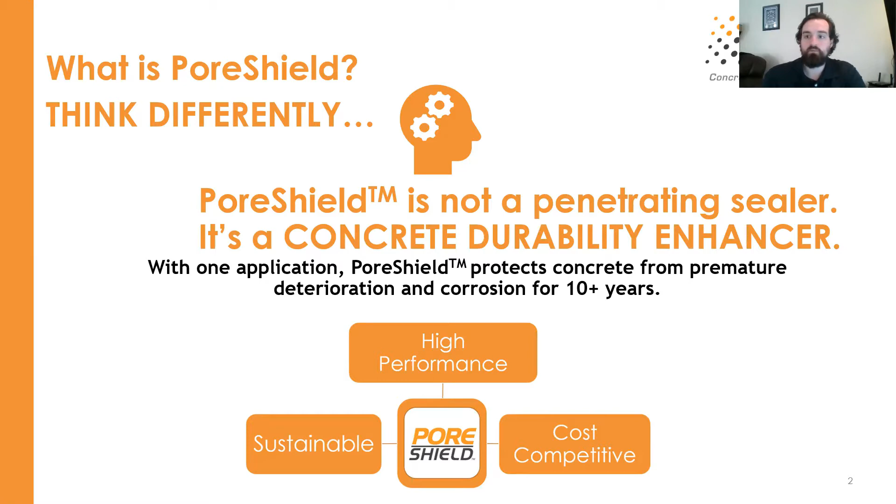The third leg of that stool being cost competitive. Obviously, budgets with things like infrastructure can run very tight, and squeezing every penny of service life that we can out of a bridge is very important, especially as we go forward and we're moving into an era of replacing and preserving a lot of our infrastructure.

So what's really different about PoreShield? Well, a lot of the technologies that you topically apply to a bridge deck to prevent fluid and ion ingress typically would undergo some sort of a chemical reaction, either a part A and a part B, or a reaction with water or a reaction with air. The goal of those products is to create a coating on the surface that then separates fluid and ions on the surface from the concrete itself.

Whereas PoreShield, or SMEPS as it was referred to in research, functions very differently. When applied to the surface of the concrete, it doesn't undergo any chemical reaction. It is actually itself absorbed into the pores of the concrete to create a viscous liquid hydrophobic barrier in the pores.

This means that if we treat the entire surface of a bridge deck, for instance, it's going to pull the PoreShield into the pores where it remains throughout its lifespan as a liquid barrier inside the pores that again is hydrophobic. So this will prevent fluid and ion ingress from coming in over time as we apply deicers and things like that to the surface of the concrete.

But since it leaves no film on the surface, it won't cause hydrophobic beading effects or make the surface slick or prevent friction or bonding if you'd like to paint over the top of it or come back with a solid coating like an epoxy barrier or anything like that.

Another benefit of being liquid and in the pores is that it's self-sealing, meaning that if we've treated an area of our bridge deck and then a crack forms in that area, since PoreShield is liquid and in the pores, the crack through the treated section will re-engage capillary suction. It'll pull PoreShield from the pores in that area into the pores around the crack, providing lasting protection even if some sort of mechanical damage does exist in the section we've treated.

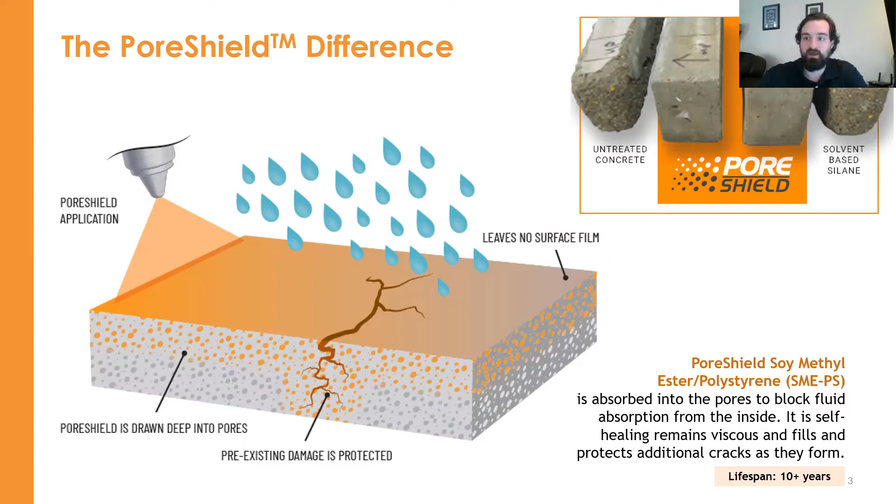Since then, the Indiana Soybean Alliance has taken the trade name PoreShield purely for industry education. It's not a commercially available product you can buy. It is available through several different brand names, through different retailers that the Indiana Soybean Alliance would be happy to connect you to, but we ourselves do not do commercial sales. So when you see the name PoreShield, that's really just to give you something easier to remember and to reference back to rather than SMEPS or soy methyl ester polystyrene.

So looking at some of the data from Purdue, when you look in ideal lab conditions, meaning we've just put the sealant barrier on the sample, there's really been no damage to speak of. The sealant is exactly to manufacturer specifications and has not undergone any detrimental conditions. You can see that the SMEPS or the PoreShield is a little bit outperformed by the solvent-based silane, but both products are keeping the concrete, compared to untreated concrete, well below that critical degree of saturation where you're going to have freeze and thaw damage or issues like that starting to begin and snowball.

Then when you introduce damage conditions, whether it be freeze thaw conditions like you see here with ASTM C666, or salt scaling, or just ionic diffusion of ions such as chloride or calcium chloride causing calcium oxychloride formation, you really start to see the advantages of PoreShield. By having that barrier down in the pores and able to move and migrate to protect new cracking as it forms, you see that the relative elastic modulus of those samples over time is well above the failure threshold, all the way out to 300 cycles, around 90% of the original elastic modulus.

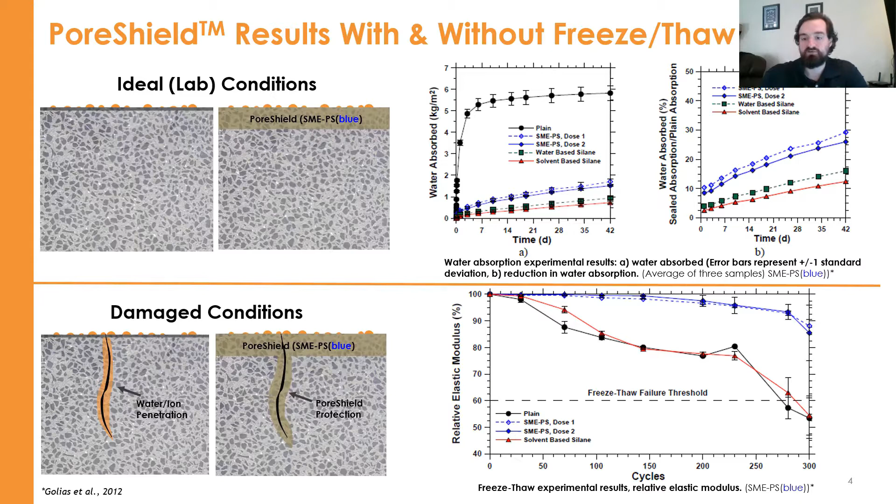Whereas with the solvent-based silane, after 50 to 100 cycles, it starts to track with that untreated concrete, because that exterior protection has been damaged, and now water is getting in through the barrier we had created and allowing that damage to perpetrate. Whereas with the PoreShield, obviously we're protecting that for the long term.

So in addition to preventing fluid ingress, the Wisconsin DOT sought their own independent study where they evaluated chloride ion penetration. They showed that PoreShield extended the service life of the concrete versus untreated concrete by 5.4 to 9 times, depending on whether or not you were already using fly ash to mitigate some of these issues.

But the really exciting data point from this study was showing that when we look 0 to a half an inch below the surface, PoreShield outperformed all of the other products tested, reducing the chloride ion concentration in those regions from that calcium chloride exposure by around 40%. I believe it was 38 to be exact. And then when you go down to half an inch to an inch below the surface, over 60% reduction in chloride ion content there, even given that exposure like you would see with de-icing, for instance.

So the deeper we go, the better protection you're getting from PoreShield, because it's actually been absorbed, it's filled the pores with that liquid barrier, and it prevents those ions from penetrating deep into the concrete. And I would add that even though PoreShield was the best performing product in this study, this really isn't even the bread and butter of PoreShield, because this was only on a 1-year time frame.

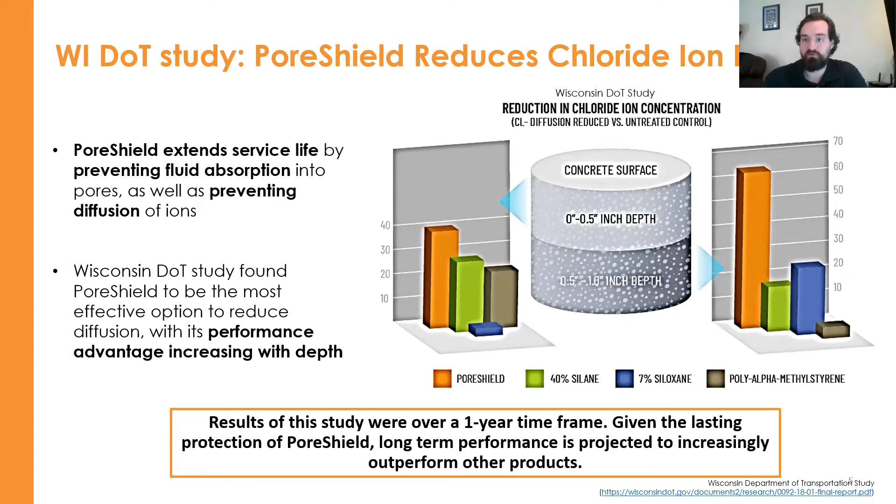And you really expect to see the advantage continue beyond 5, 10, even more years than that. And especially when we have those deleterious conditions, some of those other products are going to start to fall off in performance, whereas we would expect PoreShield's performance in terms of preventing ion ingress to be consistent throughout the life of the product.

We've been working with AASHTO groups, including the Innovative Technology Demonstration Group and the National Bridge Deck Preservation Groups. Part of the Innovative Technology Demonstration Group has been approved for a PoreShield field application, large-scale field applications. It'll be 3 applications that'll be tracked and monitored over the first 3 years.

One will be a pavement joint project here in Indiana off of I-65 with the Indiana DOT. The second project is going to be a bridge deck treatment in Buchanan County, Iowa. And then the third project will be a vertical surface treatment. We've got quite a few projects lined up potentially for that, but we haven't narrowed it down.

So if you in one of your counties have a great vertical surface application where you'd like to protect your concrete from salt or other ion ingress or even just freeze and thaw damage, and you'd like to reach out to us, we'd be happy to consider it for this program.

But the basis of the program is that we'll go out and we'll take cores prior to treatment for a reference of the fluid absorption of that concrete. We will treat with PoreShield, and then we will go back and take cores at 6 months, 1 year, 2 years, and 3 years to see the effectiveness of PoreShield and that longevity over time compared to the untreated core we took at the beginning. So this will really go to show the benefits of PoreShield in all these different application areas.

And this project will be monitored by an independent consultant. We've actually contracted Indiana LTAP's Pat Connor and Dr. John Haddock to be our independent consultants for this project, where they will be on site, they will monitor the application, they'll receive feedback from the applicators,

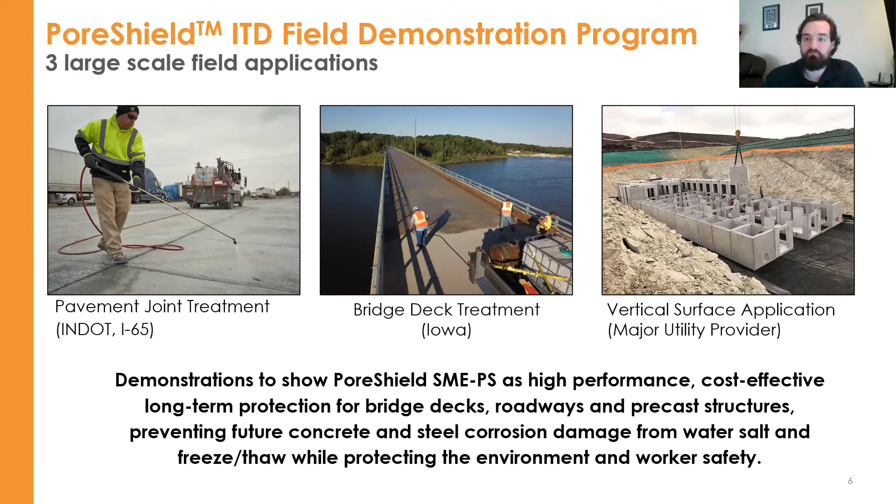and then they will be the ones that take in the data and then put all the report together to make sure that the report isn't biased by those of us in the Indiana Soybean Alliance and that there is that independent consultant in the middle, making sure that everything is above board and that what is in the report is actually the feedback from contractors and everything like that.

Additionally, here in 2020, as I talked about at the beginning, Indiana Soybean Alliance put together a program that they called the Infrastructure Preservation Program. So this program allowed Indiana counties to plan and submit bridge decks that they would like to apply PoreShield to. The program required them to go ahead and schedule the application, plan it as though they were doing it normally.

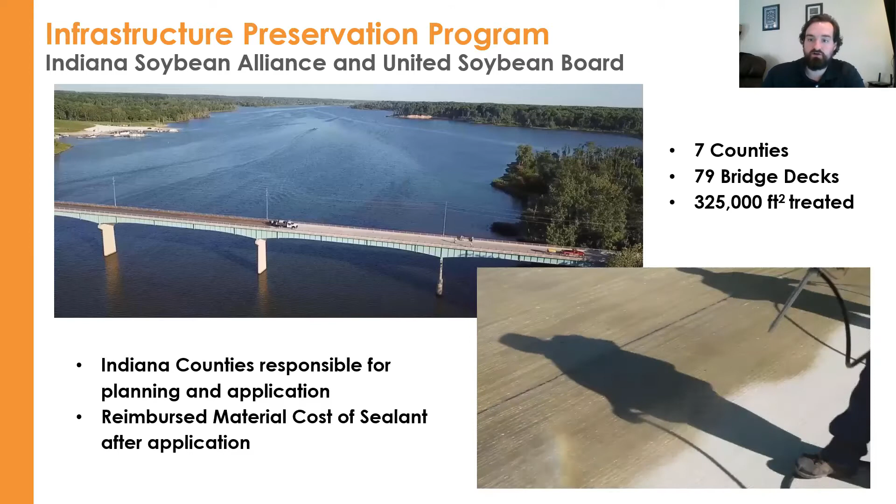Then once they've shown to the Indiana Soybean Alliance that they had performed the application, they would be reimbursed for only the material cost of the product. So this allowed them to see firsthand the application process, establish supply channels with the partners who actually sell the product, and see what it's like from start to finish on a job, getting PoreShield on a bridge deck and all of the costs and everything involved.

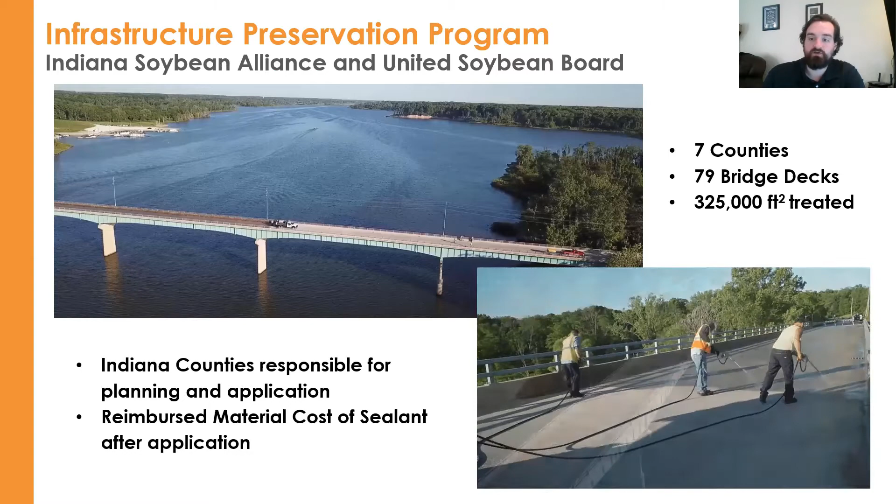So in total, the project worked with 7 counties to treat 79 bridge decks, totaling over 325,000 square feet. So now I'll turn it over to some of our county engineers and let them tell you what they thought of the project.

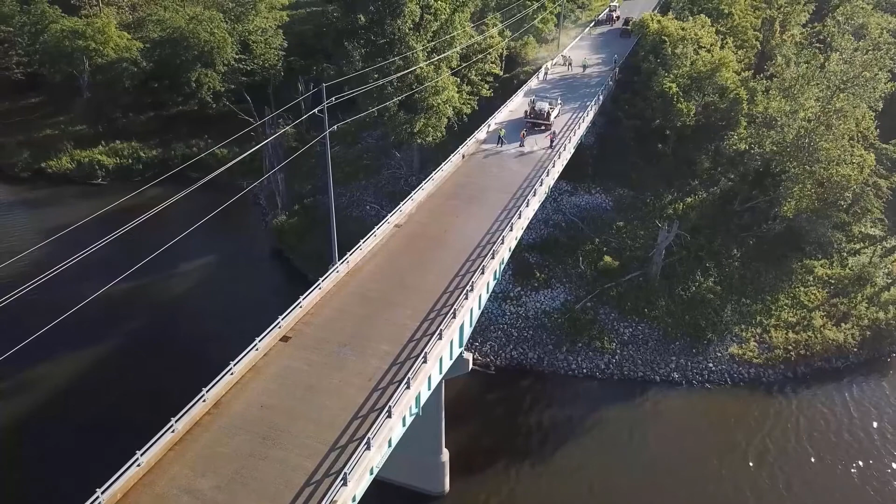It's actually gone a lot better than we had expected. As far as the time frame for being able to apply the product, I came in today originally hoping to get half of the bridges done. Here we are at 10:30 this morning, and we're well on our way to being able to complete all 6 bridges today. This went very, very well.

Probably the biggest surprise I had is just the environmental friendliness of it. Like I said, again, not having to worry about inhaling noxious chemicals all day for the guys has been huge, or dealing with burns or anything of that nature. So the fact that we can come out here, if we get a little on us, get a little bit of vapor, it's not harmful, that's a huge benefit.

Yeah, I feel like this is going to be actually a long-term positive for the budget. It's going to make the infrastructure last longer, but it justifies its cost just alone with the fact that when we're applying for grants, which is an annual process, we can show that we are maintaining our current assets and we have a plan in place. The investment in this product is going to more than see its return on investment through that process.

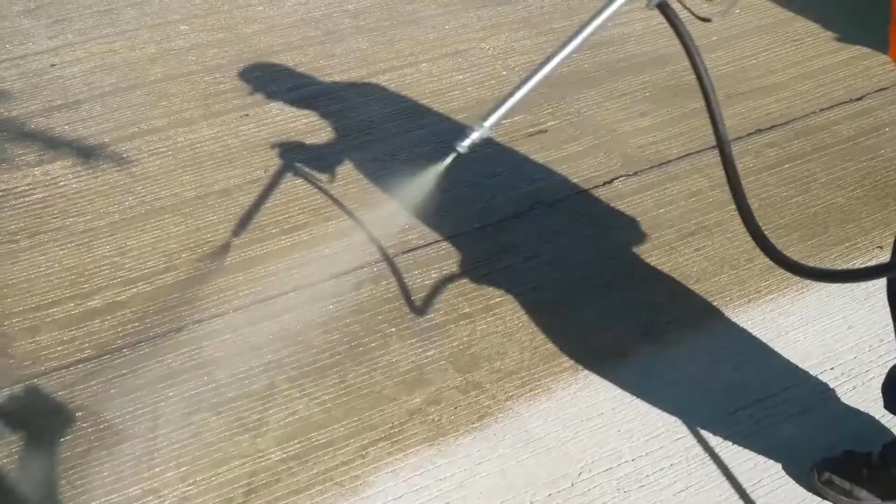Hello, my name is Carl Anderson. I am Superintendent of Orange County Highway Department. My experience with concrete dates all the way back to when I graduated high school, and even before that.

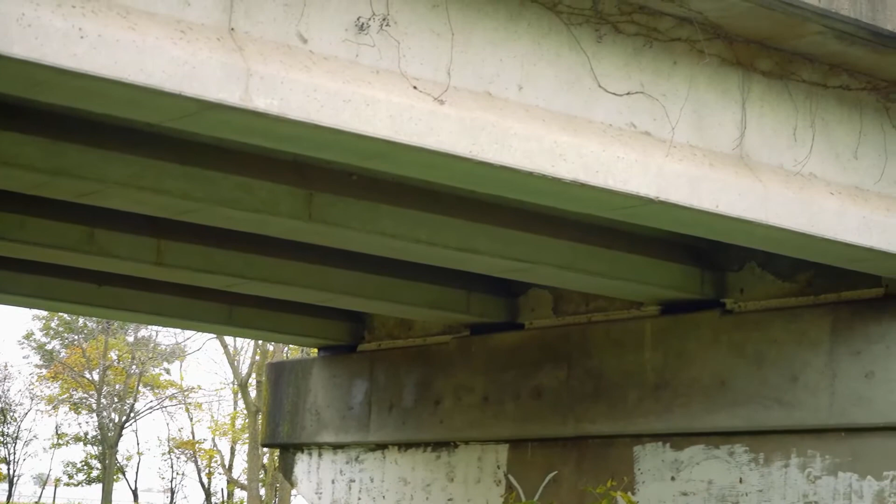Just to be honest with you, I got an email and didn't really know a whole lot about the product, but I know that we are very lacking in our preservation. And I'm always looking for ways that we could come up with some money to do some preservation. So I definitely went after this grant and was very glad to get it. And I thought if we could start here, maybe this could turn into something bigger for the county and we could keep on with our preservation projects.

This bridge was built in 1978. It is approximately a 155-foot span bridge. It is a single span bridge. This bridge is actually located very close to the largest agricultural business that we have in the community. And there is a tremendous amount of truck traffic. Approximately 50 to 60 semis a day cross this bridge, sometimes even more, definitely more during harvest times.

We came out and we had a portable pressure washer on a trailer. It took us approximately a day and a half of pressure washing. We got in every little nook and cranny, got it as clean as we could possibly get it, let it dry. And then when we came back for the application, it was a nice, sunny, hot, dry day, and we just did half of the bridge at a time.

One of the main things I like about it is it's environmentally friendly. We can spray this over the creeks, over the waterways, whether it's a dry bed or active water running underneath the bridge, and feel good about it if a drip or two were to get down into the waterways. It's safe, it's not gonna hurt anything.

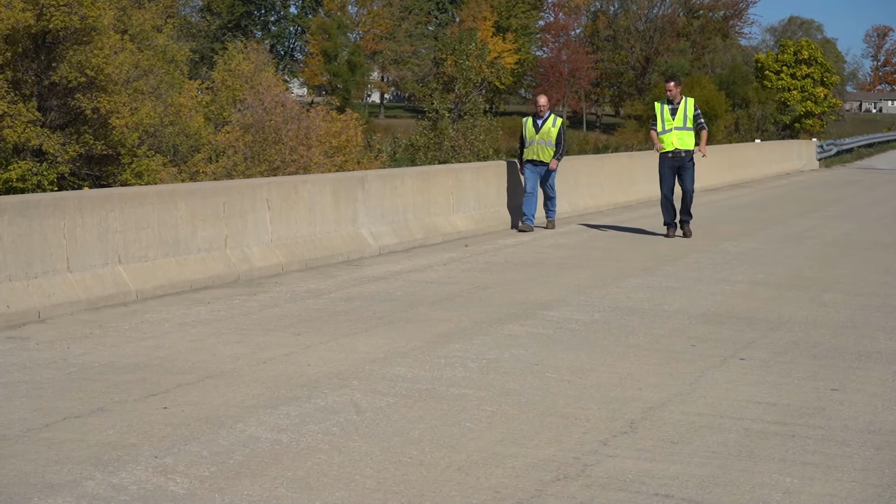My name is Zach Smith. I'm the Noble County Engineer. I oversee Noble County's Infrastructure Asset Management Program, which includes over 800 miles of roadway and 62 bridges. And then when we were looking specifically at the concrete program, we heard about PoreShield, and it was an excellent candidate for what we were looking for as far as being cost effective and being able to self-install.

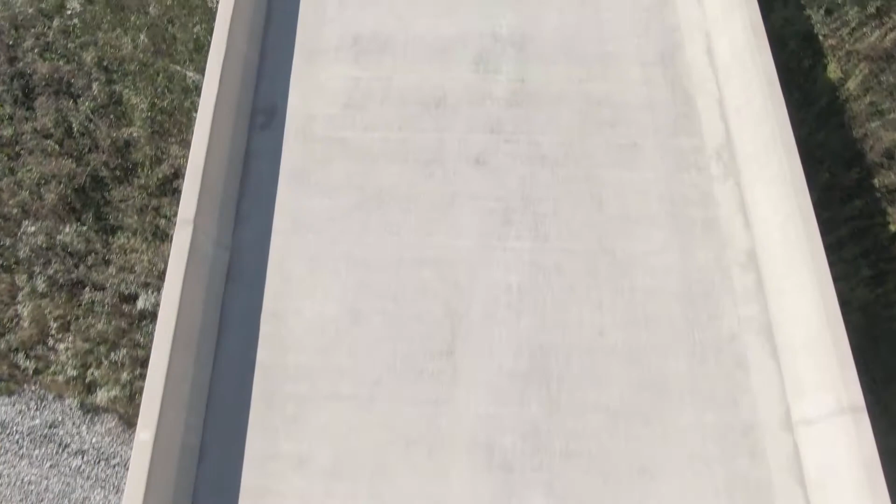As we looked at all the various products and we looked at our program, it was focused on bridges that were in good condition, that didn't need some of the deeper treatments, and PoreShield, being a surface sealant, was a perfect fit for our program.

So concrete on bridges is very porous, and especially in the northern states where you have winter operations, there's a lot of chloride damage due to our de-icing treatments, which is a contrast to what we do with our asphalt roadways. Joints obviously allow water to run through them, whereas on a porous surface, water and specifically chlorides can sit there and be saturated over time.

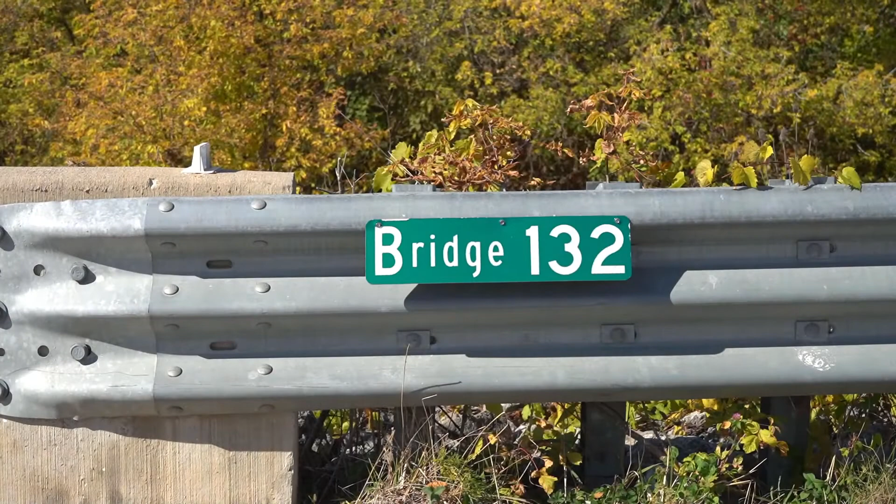This was a historic bridge previous to it being replaced in 2008. It went from a wood plank deck to a concrete deck. And when we were looking at starting a preservation program, we were focused on bridges that were 15 years or newer, that still were in good condition, still had a lot of life left, and our goal was to preserve that life as long as possible.

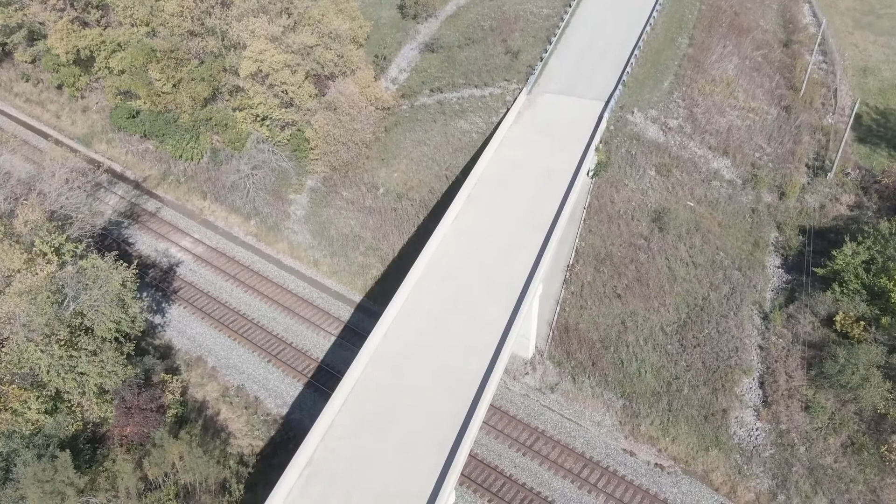We were really starting at ground zero when it came to concrete protection. Historically, we've had a lot of bridges that were older, and there was no preservation plan in place. So as we looked to the future, we looked at a lot of our newer structures and how to preserve them long term. Obviously, we want a proven product that's been studied, but we also want a product that we can install ourselves without any special licensure. So when we were looking at products, PoreShield met both of our criteria.

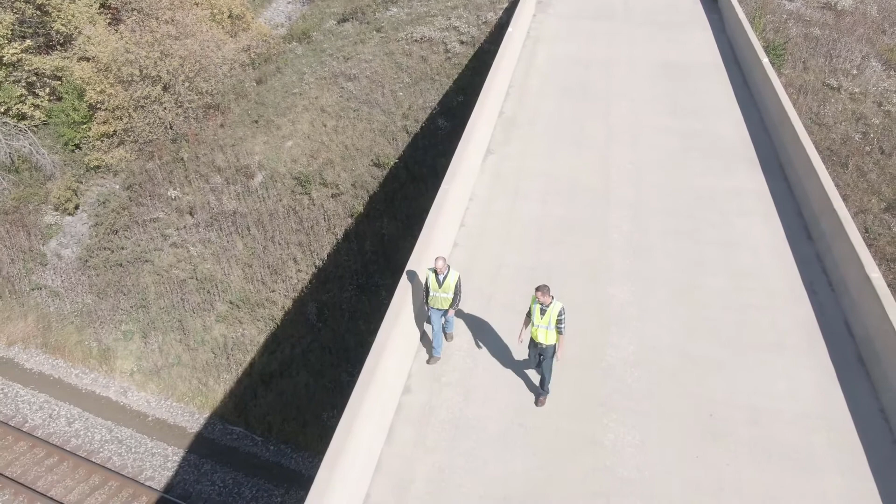When we were originally looking at a budget for this year's startup program, we had $50,000. We were thinking that might have been on the low end. We ended up doing 13 structures for under $10,000. So that was the big thing that stood out to me as far as starting a program and having that be a surprise.

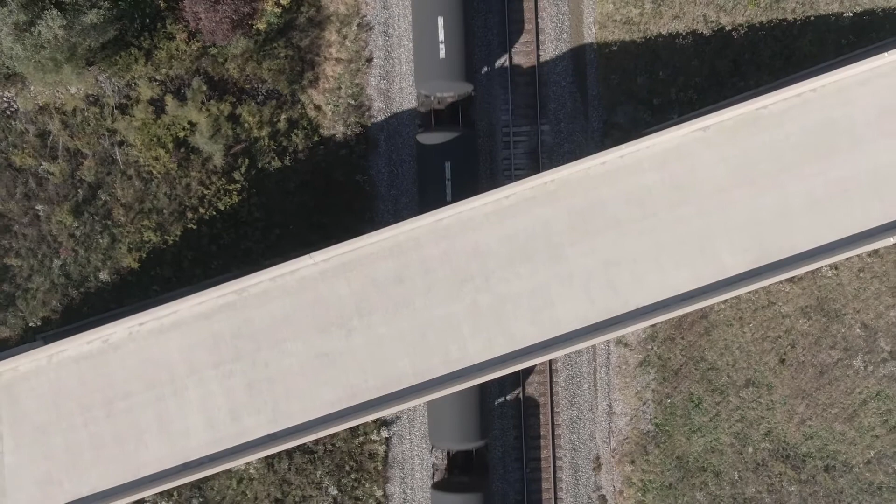Our whole program is focused on public service. We obviously maintain our network to provide transportation for everyone. So it's good that we have a cooperative relationship with farmers who obviously use our roads. We in turn can use their product to preserve the roads. I think it's a win-win for everybody.

All our bridges are variable lengths, but it doesn't really affect the installation process. We had a two-man crew with in-house equipment, just a single pickup truck and then a sprayer. And they were able to install one lane at a time. Your biggest thing is dry time. The installation goes very quick, regardless of the structure length. Dry time varies based on age and on each individual bridge's attributes, but in general, it took about a day.

We looked at the research after we initially had discussions with ISA, which came back great, and then we looked at the pricing, which also came back great, and then the ability to install in-house really made the decision for us. Overall, our program this year was very successful. There were no surprises. We were able to install very easily. The program was very cost effective, and we look forward to continuing the program for several years to come.

So as you heard there from Cole, Carl, and Zach, the infrastructure preservation program in 2020 was quite successful. That's in large part due to that three-legged stool we talked about earlier of high performance, followed by sustainability and cost competitiveness. The performance derived from that ability to limit not only fluid absorption but ionic diffusion, preventing issues such as de-icer deterioration, salt scaling, freeze and thaw damage, but also PoreShield can be applied in low and high temperatures without fear of yellowing or bubbling.

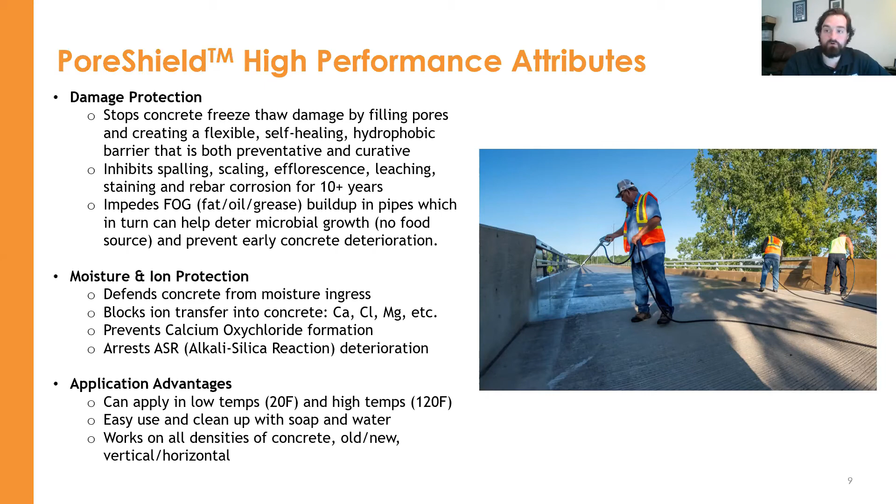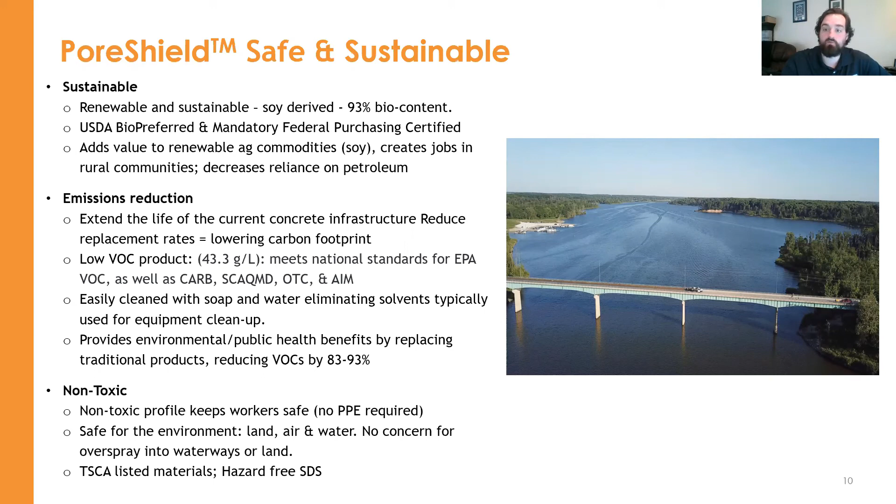It's very easy to clean up just with soap and water, eliminating the need for solvents, and it works on all densities of concrete, old, new, whether it be high performance concrete or high water to cement ratio residential concrete, vertical or horizontal surfaces. It's safe and sustainable, USDA bio certified to be 93% bio-based content. It's a low VOC product, meeting the EPA standards for VOC, as well as CARB and the Southern California Air Quality Management District. Very easy cleanup, like we said, no need for solvents, and the non-toxic profile means no PPE is required, and it's safe for land, air, and water, so there's no concern for small spills or runoffs.

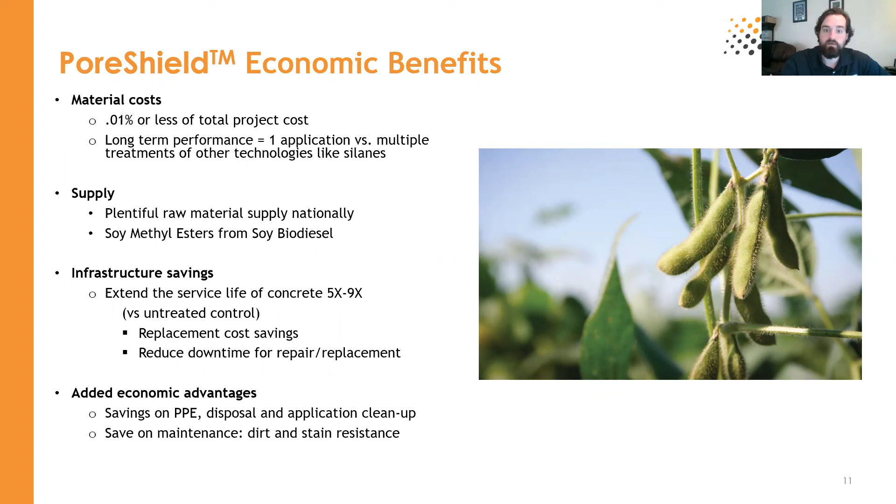Economically, it makes a lot of sense. 0.01% or less of a total project cost, and it's going to buy you 5 times to 9 times the service life versus untreated concrete. And then there's very few added costs. Like we said, no PPE, very easy to apply, and disposal and cleanup is very simple. So very easy to incorporate into the budget, and I hope you'll consider using PoreShield for your applications in the future.